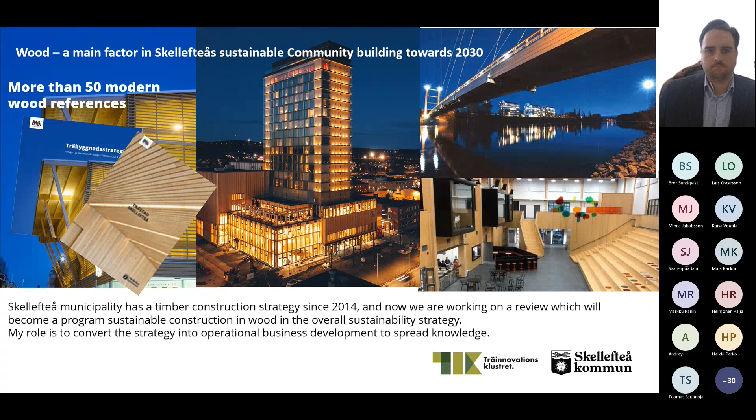I think we will be there quite soon. So, sorry, but I will send you the file afterward. Yes, the materials will be shared afterwards. Please, yeah, then I go to the last slides I have.

Thank you for your attention, and here you have my contact details. If you want to ask any further questions, you can send me an email. In the Wood Innovation Cluster, we value networking and exchanging experience. And then I will leave over to Bror. Thank you.

Hello everybody, thank you for staying in the meeting despite our problems here, but we will try to restart and have a better pace and skip the videos so we don't get into this trouble again. My name is Bror Sundqvist, I work here at Luleå University of Technology, and I will talk a little about the innovation and research we do, basically around processing of timber, promoting new materials and enhancing materials for wood buildings.

To begin with, I would like to orient you to Luleå University of Technology. Some short numbers: it's a little more than 50 years old, a mid-size university in Sweden. The main campus is in Luleå, and there are 4 other campuses. In Skellefteå we have our wood focus, you could say.

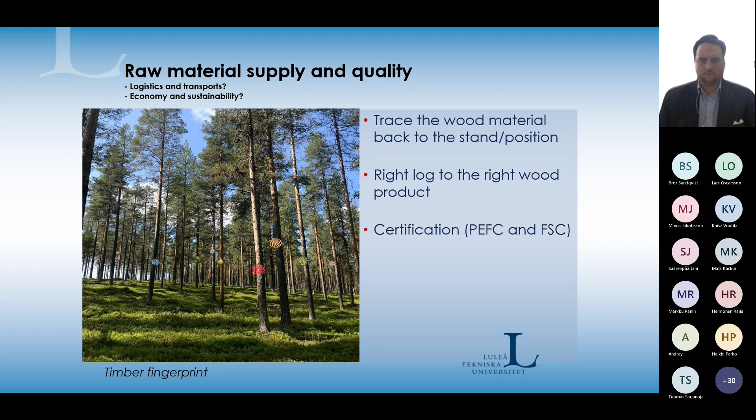This is one of the main core activities we have in Luleå University of Technology here in Skellefteå. Basically since 35 years ago the world leading around X-ray technology for scanning of wood, and it's now introduced since 5 years ago into sawmills all around in Scandinavia to better look inside the logs, to really get the feeling of what type of features do you have inside the log.

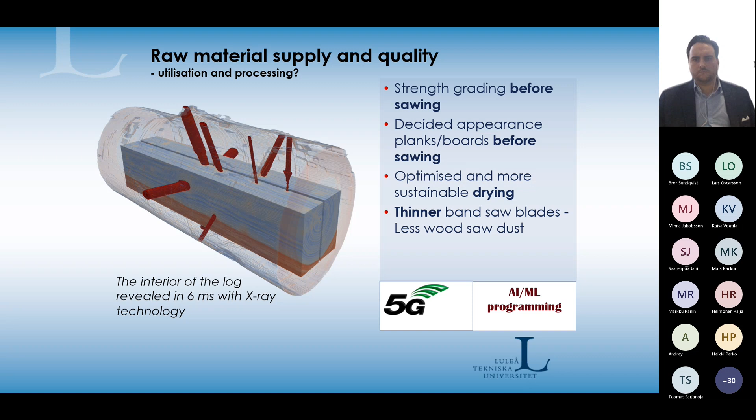And as you see here, this is a simulated picture with a log, and also how you try to, before you saw, decide what type of planks and boards you can get from these logs. And the neat thing about this is that research is trying now to look at doing the strength grading before you saw it - before you have these actual planks, you decide the strength and maybe also the appearance and look of it, if it's supposed to go to fine joinery, or if it's going to construction material, for instance.

So this is a very, very important thing for us. And it's a lot of imaging around machine learning and artificial intelligence. And this is a field that is progressing quite rapidly now.

And of course, also we can combine this with other type of equipment, so we can look at the drying. So we have drying modules linked to this X-ray CT scanning modules. And we can also look at other types of properties while we are scanning this with X-rays, so we can get videos and other types of methods to look at new ways of using wood.

We have also, for instance, a lot of projects around how you can make a more efficient way of sawing. So we have introduced, and it's now in place in a sawmill south of here near Umeå, where they have introduced thinner saw blades. So they are much more efficient in sawing this, and the waste in form of sawdust is minimized.

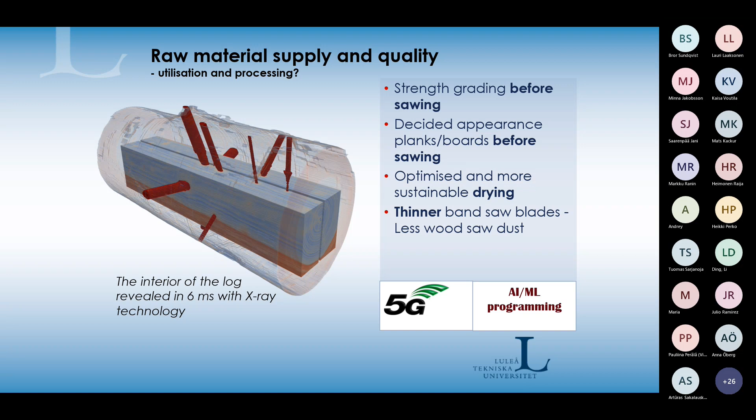So this type of effort we're trying to do - we started this since 2020, the City Wood Research Program, and it's focused very much on research and PhD students to really develop the new tools, the new methods, the new way to process wood in the best way, to address the global challenges, and also to find the next generation raw material supply chain for the industrial wood building. So it's a lot of effort on this, and we think it's very important to be a part of the chain when you use the forest assets in the most optimized and sustainable way.

Of course, education is a key element to take on this new method, this new technology. So we have different types of master programs, and these are top-up programs. Students often come from other programs with a bachelor's degree to begin with, and make their last years here in Skellefteå combined with other courses.

We also have professional education for wood technology, which consists of short courses, mainly digital, adapted mostly for industry to attend. Approximately 80 hours is the time needed to complete these courses. We think this has to run in parallel with all the other development, so there's also the possibility to gain new knowledge and educate yourself.

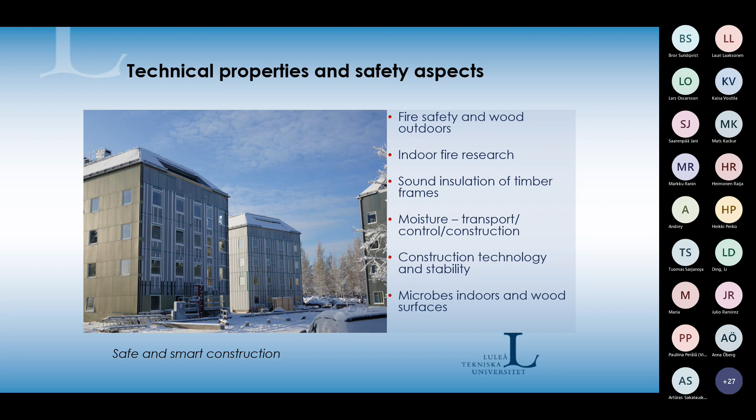This is a project running at Skellefteå Hospital at the orthopedic ward, where we try to look at the health effects of wood. This project has completed some parts of it - the indoor environment has been measured, and the clinical trials will be finished later this year.

So maybe in the future we can hope to build up a competence center around wood and health, and see how this relates and what new methods and new knowledge we need to address this, because it's a very complex situation.

Thank you. That was my speech.

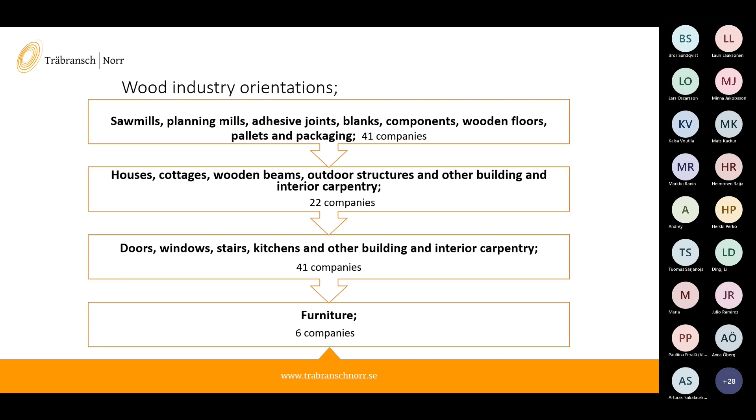Why do I show you this? Because I take my last picture - if you want to have contact with these companies, I'm the business competence, and I can help you further to get in contact with the companies in Västerbotten, because we are this umbrella organization, and I'm the contact to help you solve it. Thank you.

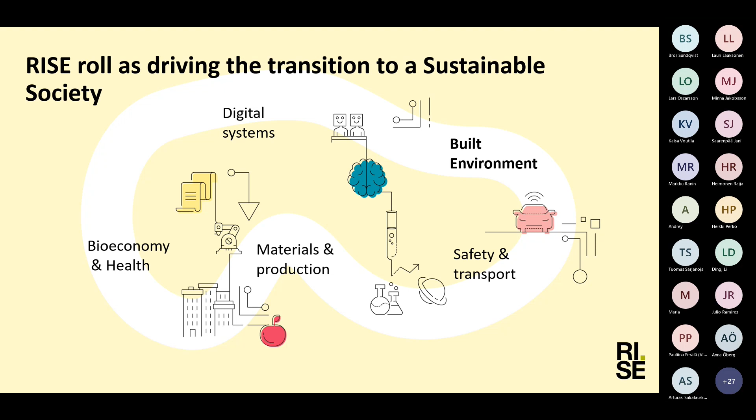The built division is working with society's questions quite a lot, and we work with the municipalities in different kinds of ways. So we are a supporting organization who can contribute with a lot of activities to drive this transition, so Sweden can become the welfare state that is fossil free in 2045, I think it is, if I don't remember wrong.

We are not 100% using bio-based materials yet, but we are aiming for it shortly. So this is a wide example of what RISE is working with, from the north of Sweden to the south of Sweden.

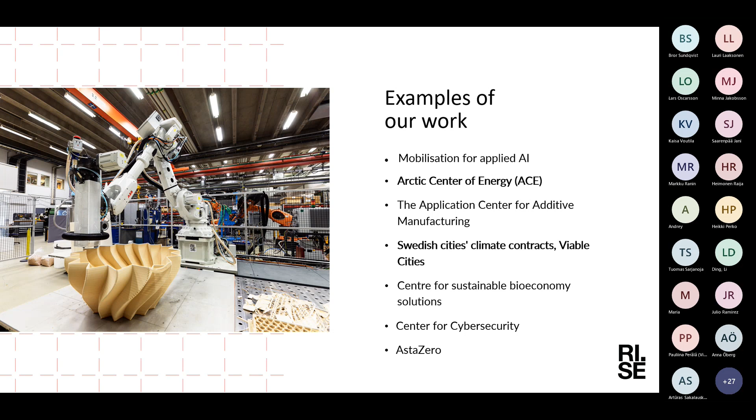If we go down to what we locally are doing—and we are not only working with this locally, we are working with wood questions in the entire Sweden—we also want to support the industry like we do in the cluster. We support the business in a good way, and we do it together, in cooperation, with a lot of activities to support them with technical experts and also the tests they want to do.

If you're looking at the structures, which is quite important when we're talking about building systems—don't know if Lars is going to talk about it, but Lars, you're in the left corner of this with building volumes at Lindbäcks, and you have high productivity—I just wanted to show what kind of building system we have in Sweden when we're talking about wood building with wood framework.

So this is the three system that we're talking about in Sweden. I will not go into detail, but just so you are familiar with it. If you have any questions about it, we can talk about it later, and maybe take it in detail later on also.

If you're looking at the culture house in Skellefteå, it's a combination of all structures, so to say. The hotel is volume based, and the framework is pillars and posts and beams and all that stuff.

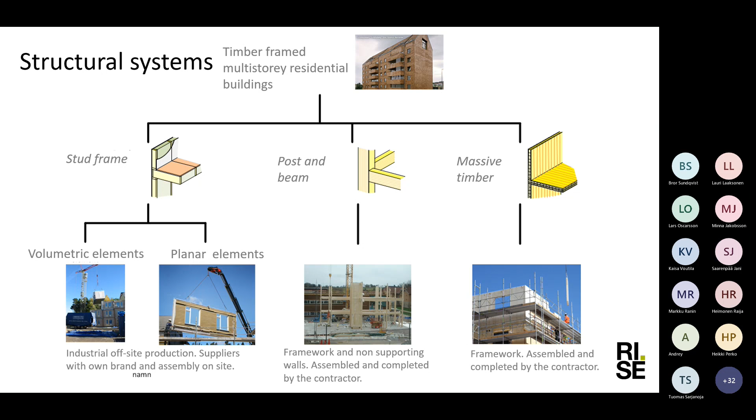The business of multi-storey houses has increased quite a lot the latest years. When Sweden joined the European Union in 1995, we were allowed to build higher than 2.5 floors, and now, as you know, in Skellefteå, we have a hotel that is 20 stories high.

So the business is increasing quite a lot, and a lot of this we can thank the research, the technical aspects. We have solved a lot of issues, but we need to continue doing it with the fire, acoustics, and moisture. And also we can thank Lindbäcks Bygg for their prefabricating volumes, which has reduced the production time.

But what we also see is that the building sector today, the total building sector, is quite a big contributor to CO2 emissions. By using wood, as Bror said, we store CO2 during the lifetime of the building, which is quite good also.

So the climate declaration that arrived in Sweden in 2022 will hopefully also increase this expansion of wooden buildings. But we still need to do a lot of research, and that's why we need Luleå University of Technology and RISE, and we also need the local partners to develop this.

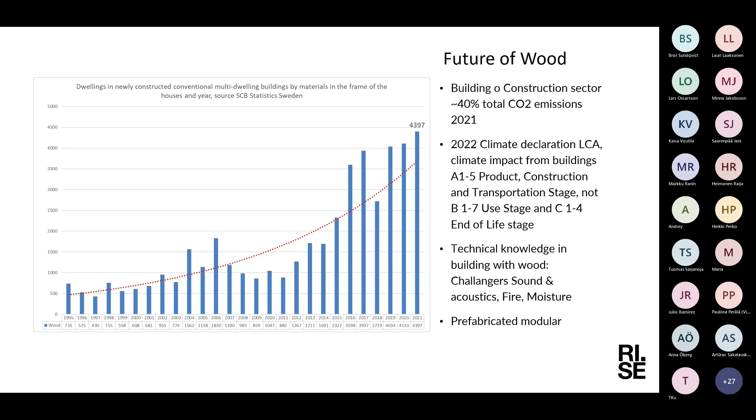We also need to think about using wood in a better way, and not only like we have in Sweden, where we have a linear flow. We need to make it more circular and think about it in the early stages.

I will show you some of the examples that we are working with, but we are quite focused on this. To do that, we need to be working together in cooperation with the business, and Sweden is also an important communicator to work with this, to explore this further. We need to test and verify if we can circulate the building that we are building today, so we can circulate it tomorrow. This is some of the activities we are working quite heavily with.

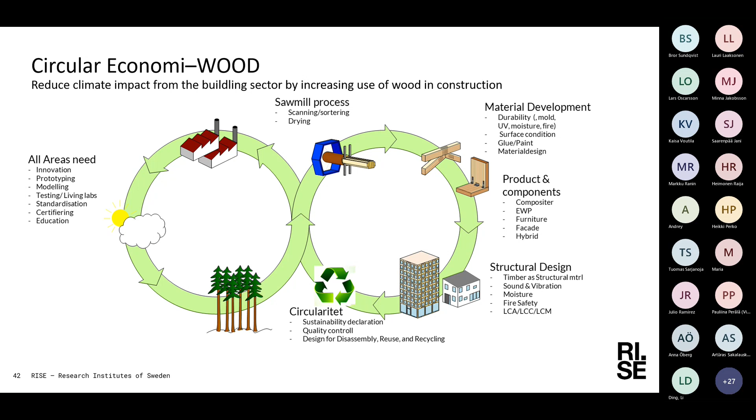So we're working with deep learning and using modern techniques to optimize the process in the sawmills. This is a project that Jessica Becker has also participated in, and RISE has been a part of that, along with Arbio and Swedish Wood. It's quite a nice product to show.

The project has ended, and I wanted to show you that you don't have to tear down all the buildings that are built in concrete and replace them with wood. You can build timber light construction on top of a building. In Umeå, for instance, on top of a marketplace in the center of town, they've built nice apartments. Umeå is quite a nice town with a lot of these on-top buildings, so this is something you can use.

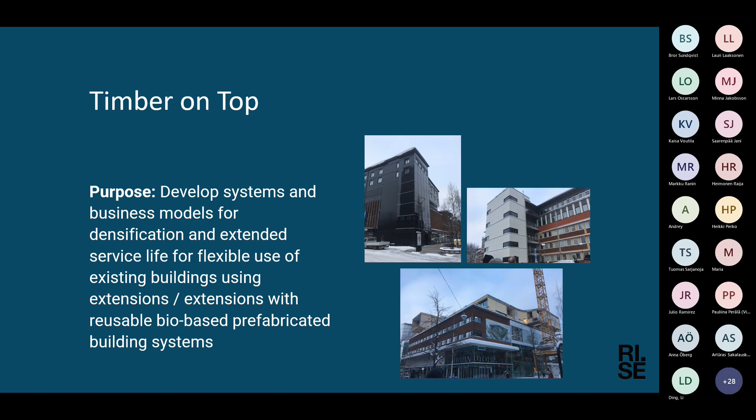This is also something we're working on. We don't want to focus only on wood in wood buildings - we can also use it in wind turbine towers. This is a project we are running together with a company called Modvion that started this journey in 2015, and now we are doing some trials. Hopefully by Q3 we will have the first 100-meter wind tower placed in Varberg in southwest Sweden. That's 100 meters high, so we are aiming for this, and it's really nice to do. We're hoping this can be a good business opportunity to use wood in other applications, and as you can see, this stores quite a lot of carbon CO2 if we manage to do it. So far, everything looks really, really good.

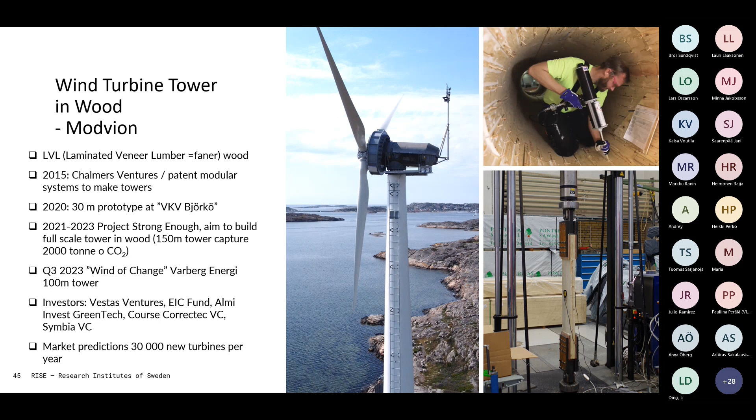To end my presentation, we have also worked to make the wood value chain a little bit closer, together with Lindbäcks Bygg, to design for the future. The municipality of Skellefteå is also part of this work, and here we want to find a good way so we can replace or move a building if needed in the future. So if it's a kindergarten, preschool, or something, instead of wanting to move it elsewhere, you should design and build the house so you can easily reuse it somewhere else, instead of it ending up like chips in a power plant. This is something we're working on. We think it can be a really good case for working with building volumes, because then we have high value instead of using planks that end up in the municipality's junkyard.

That can be a little bit hard, so to say, but I think this is something quite nice to know about. The project will end this year, so hopefully a presentation will be available next time so we can talk more about it - what the obstacles are, and also find other possibilities to start reusing timber buildings in a circular way. So these are some activities that RISE is doing in Skellefteå.

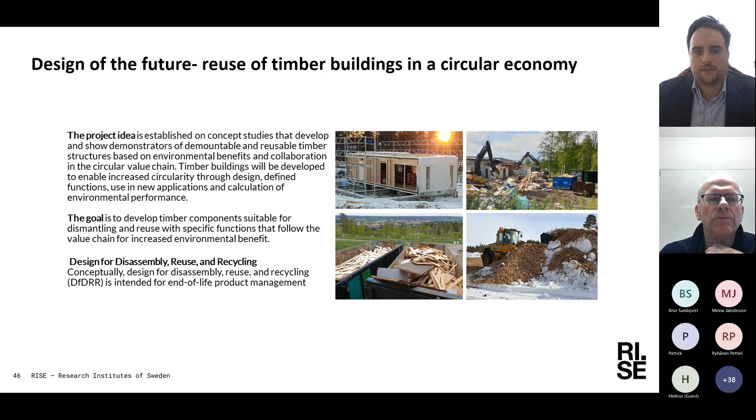I see, thank you all for your presentations. I think we get a nice view of different types of actors in the cluster and what you contribute, and how the collaboration actually happens. I think we will take the questions at the end, so that we get the presentations through, and then we have reserved time at the end for questions.

Hi, I'm Henrik, and this is our factory. We are an industrial building company using wood from the northern forest, creating apartment buildings in Europe's most modern production facility. In a weather-protected environment, the volumes are built step by step along our preparation station and our main production line.

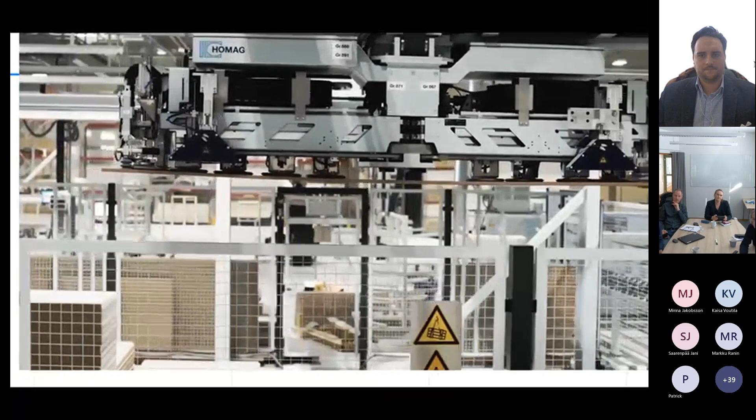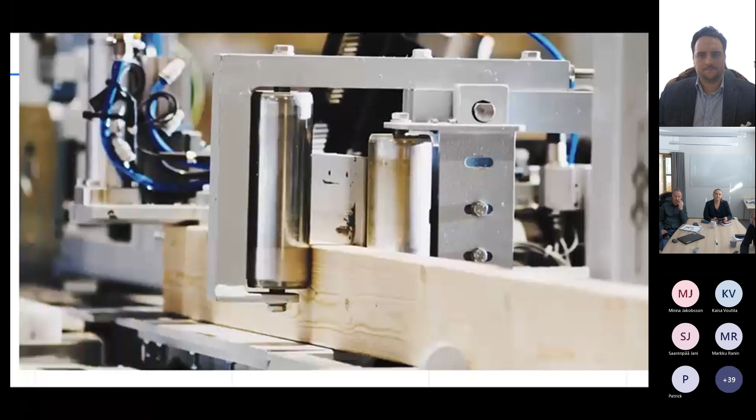Our building system can fill many different needs. We build everything from student housing, rent-controlled apartments, to condominiums and retirement homes. We offer a full service solution where we take responsibility for the entire process, meaning security in terms of price, product and delivery times.

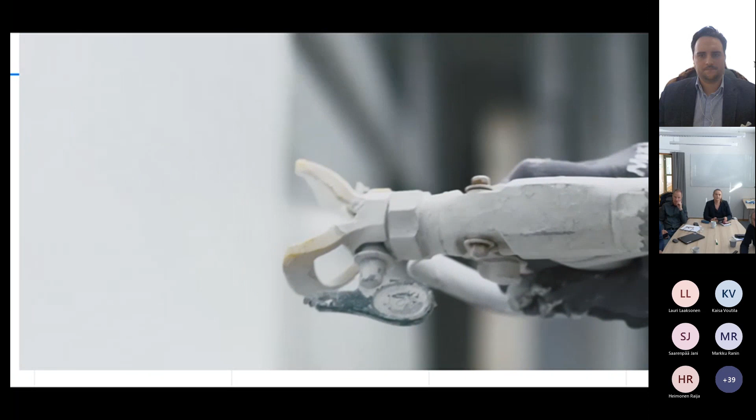Along the wall line, the exterior walls are put together. Here, we assemble windows, bolt, insulate and paint. When the wall is ready, it proceeds to the main production line for assembling. In parallel, the partitions are built and painted. Just as the exterior walls, they are fully finished when they are assembled.

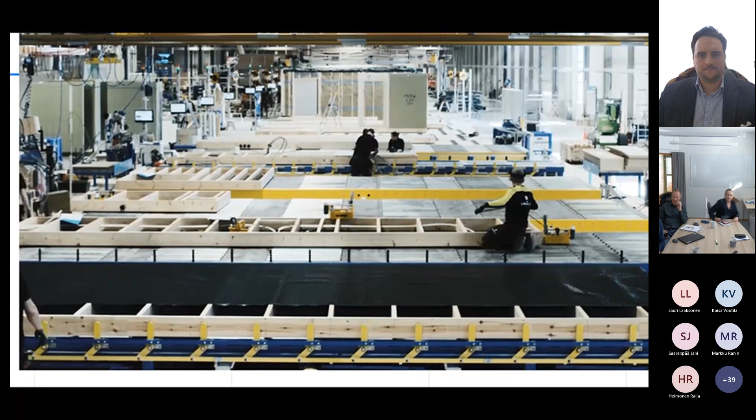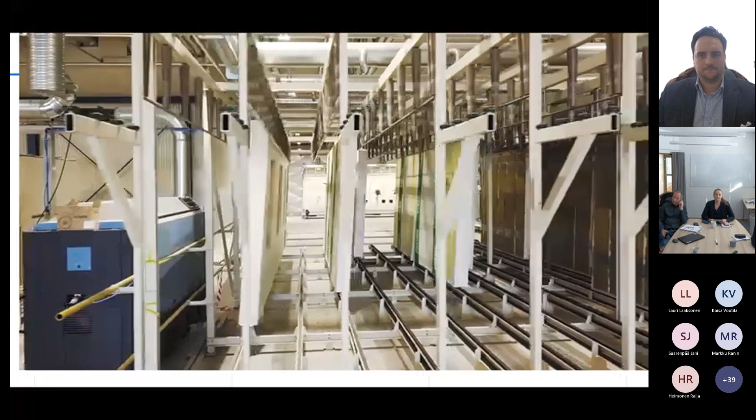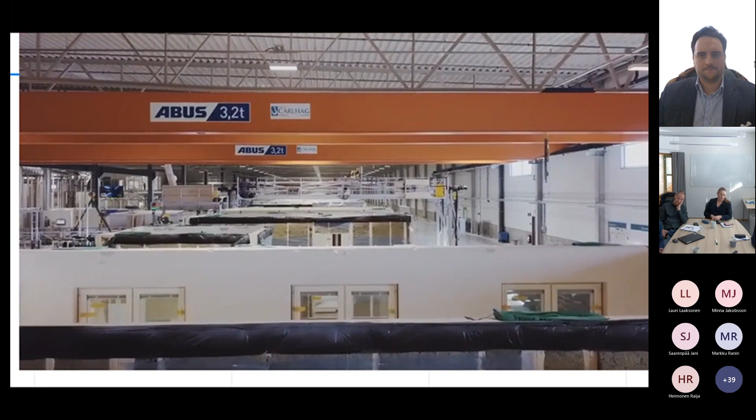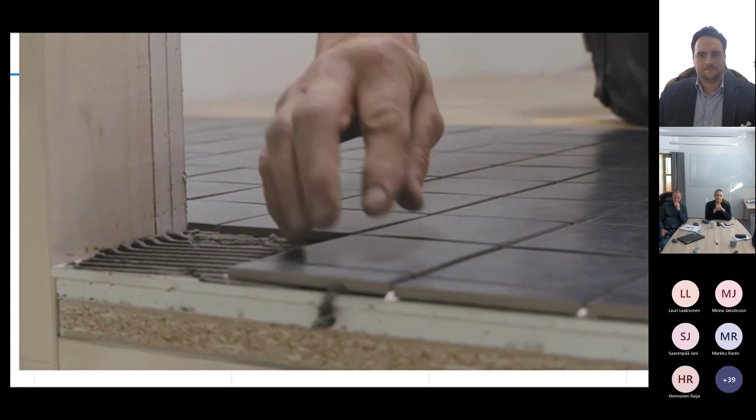The main production flow begins with the construction of our floor structure. Then our composite bathroom is put in place and partitions are applied, as well as exterior walls and ceilings. When all elements are put together, we install the kitchen and apply the floor surface layers and complete with plumbing. After that, we review the volume to ensure quality.

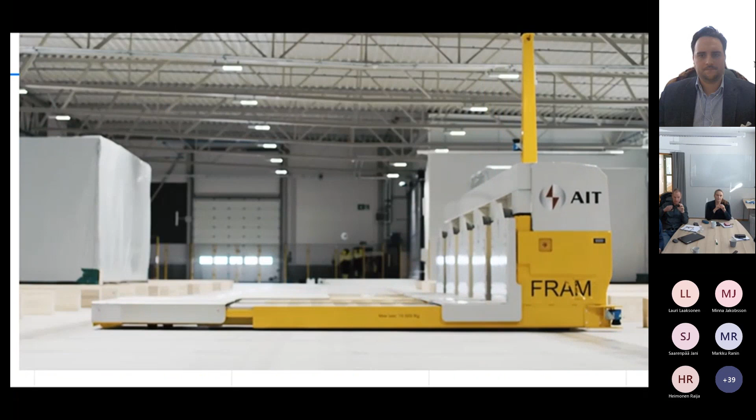In the last step, the module is sent to the automated warehouse, where it's collected by an autonomous robot loaded on the trucks. All that's left is delivering to the construction sites. Thanks to our industrial construction, we manage resources efficiently and build climate and cost efficient with high security.

We build industrial because we believe in creating homes for more people. We build industrial because we believe in living for more. We build industrial because we believe in living for the many.

The company was started in 1924, and next year we're going to be 100 years old. Today, at the management level, we are in the fourth generation, but the fifth generation has started to work in the company. In the start, it was a sawmill that did sawing of the lumber in the wintertime and building a house in the summertime.

We continued with that for a while. In 1994, as Rickard mentioned earlier, when we joined the EU, it became possible to build more than 2.5 storeys. So now it's possible for us to build up to 8 storeys high in volume modules.

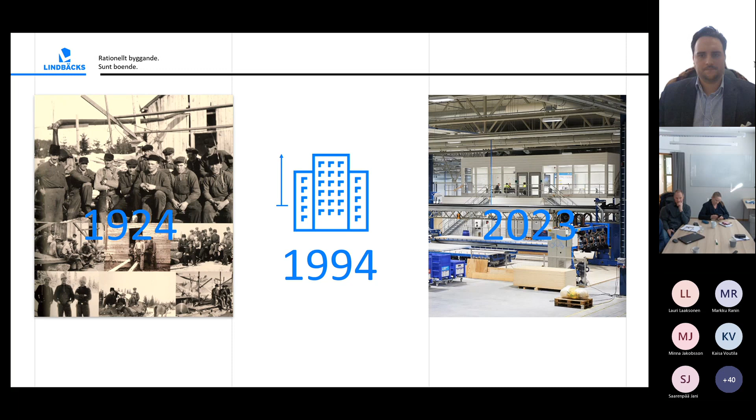Our capacity in 2 factories is about 22 volumes per day, and we can do up to 2,500 volumes a year. From 2017 to 2023, we have threefolded our capacity, and our turnover this year will be 1.4 billion Swedish crowns.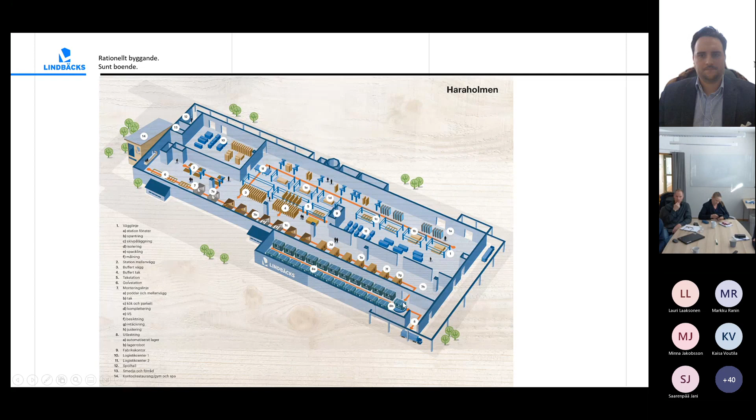Here is a layout for the Haraholmen factory. We build the walls here, and here we put the volumes together that you saw in the movie. Here is the ready stock, and here is the loading onto the trucks. Very important parameters here in the factory are the man, the machine, the method and the material, and it's a collaboration of these things. It's very important, when you do development, to take care of everything.

We do this with ecological, economic, and social sustainability in mind. To do this in a very good way, we use lean production, and we have adapted our tradition of building wooden houses, so we call it industrial production according to Lindbäcks.

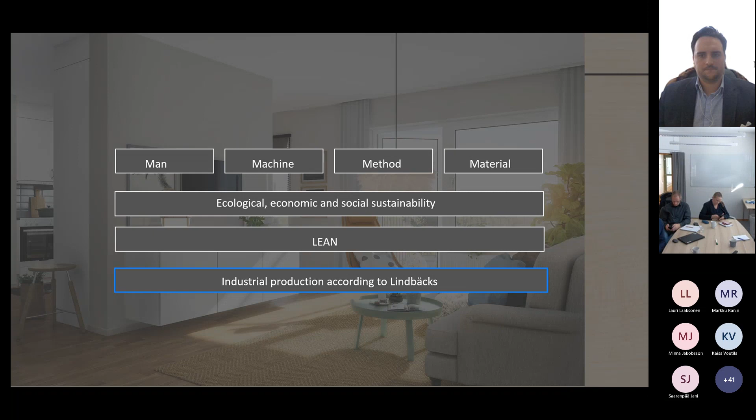To build a house, you need to have an idea. Then to design the house takes about 30 weeks. The next step is production, which takes about 4 weeks, also inside the factory.

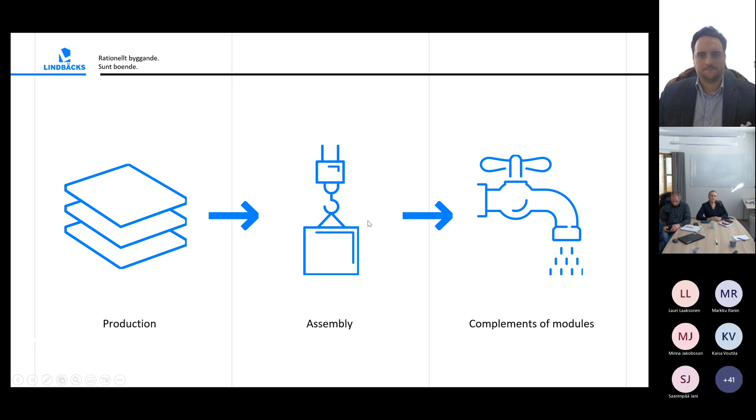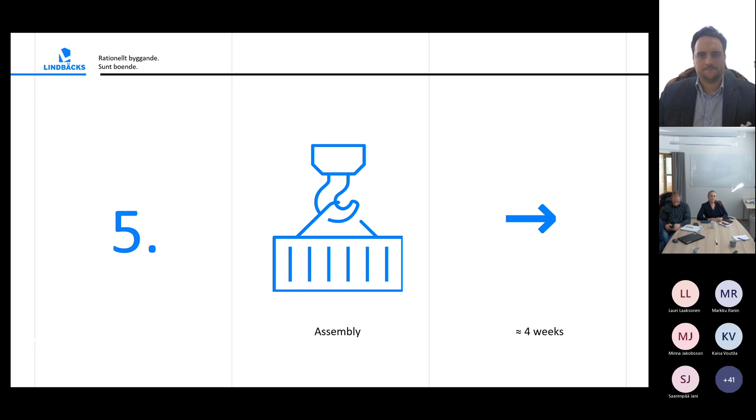And it's production, assembly, and then we do the interior in the volume. Then we transport to the construction site and assemble the house. It takes about 4 weeks. Then we do the completion of the house, fit every volume together, do the rest of the painting, ventilation, and electrical connections that weren't made in the factory. You need to do a completion on the construction site, and do the facade, to make it work in a proper way.

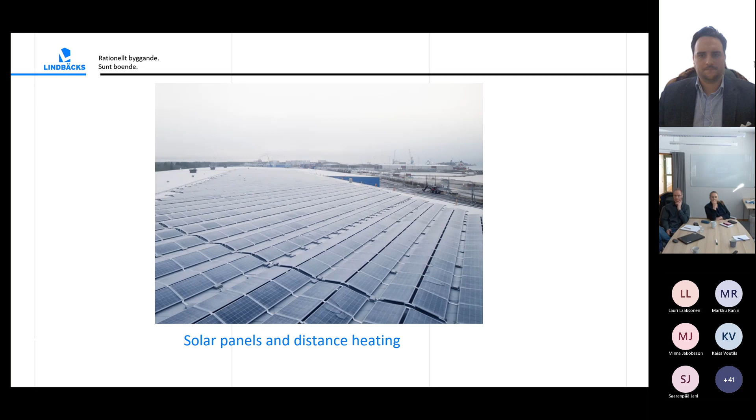We build ideas because we want to make a difference. We aim for 50-50 between women and men, but it's a challenge to make it work. We put about 3% of our turnover into research and development, and we have a big collaboration with Luleå Tekniska University in Luleå and Skellefteå, and a big collaboration with RISE in Skellefteå, and a lot of work with RISE in Borås too.

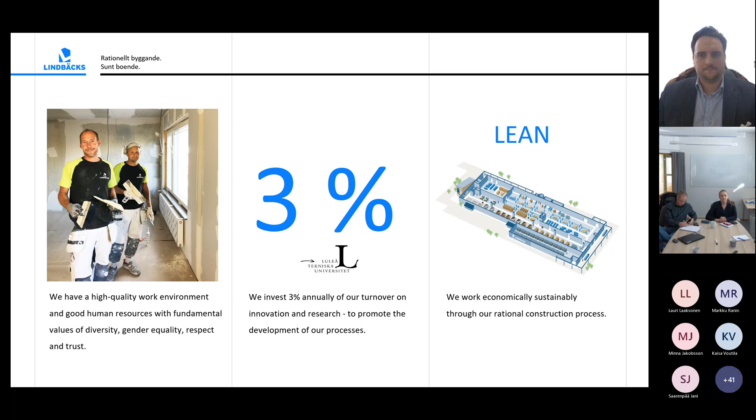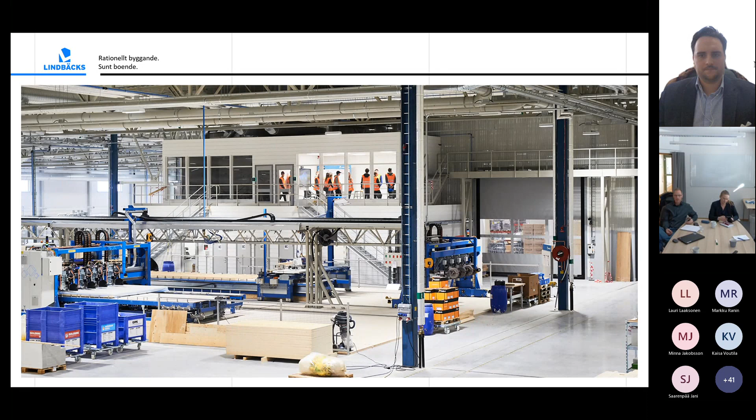Here we have some pictures from our factory at Haraholmen. Here we have integrated the managers' offices in the factory, and here is a logistics part where we pre-pack everything and then send it out into the factory.

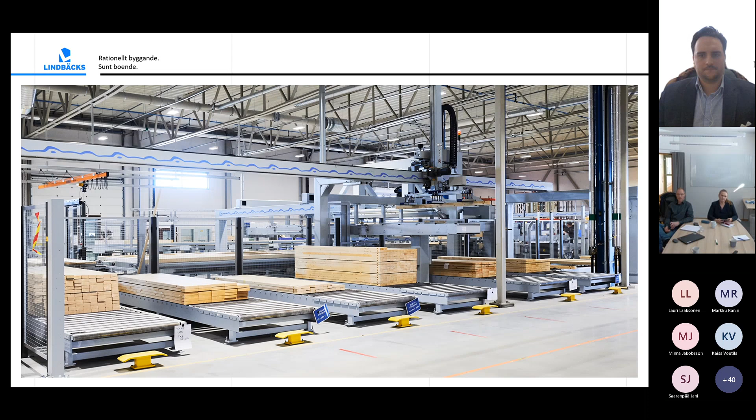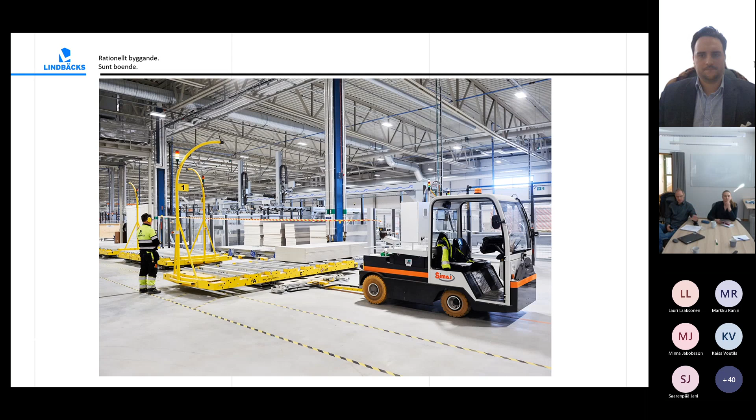Here we have studs for building the house, and here we have the train with gypsum. The gypsum has the possibility to protect the wooden studs from fire and create stability in the house. It's very important to have a mixture of materials to optimize it.

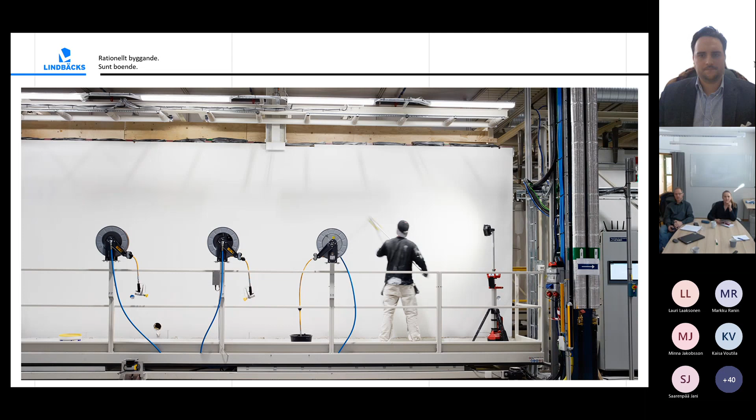And here we do the grinding, sanding, and painting. Here are walls in our system. And here you see the floor, and on the floor we have a pod—it's our bathroom unit, a daughter company of ours.

A challenge when building this factory—the factory is actually 400 meters long. If we hadn't produced this kind of bathroom pod ourselves, the factory would need to be about 600-700 meters long, because of the challenge of drying the tiles for the fixtures behind them. That was the reason we started that company.

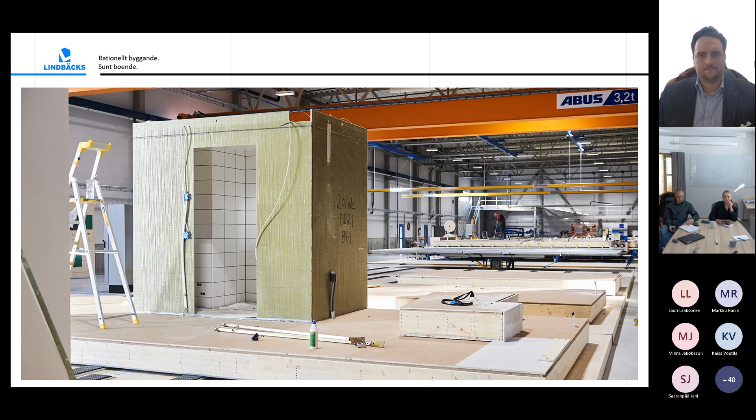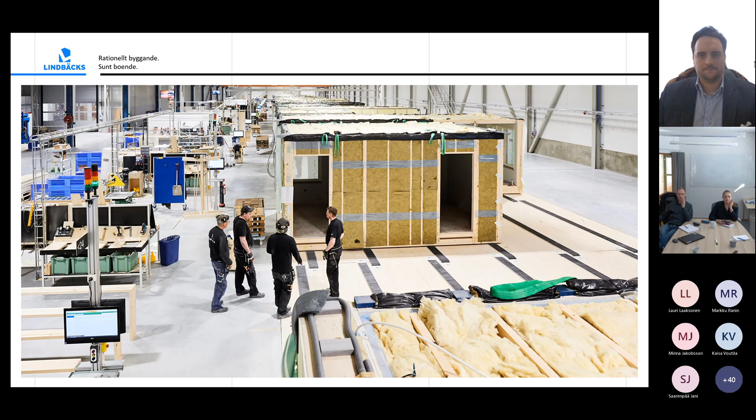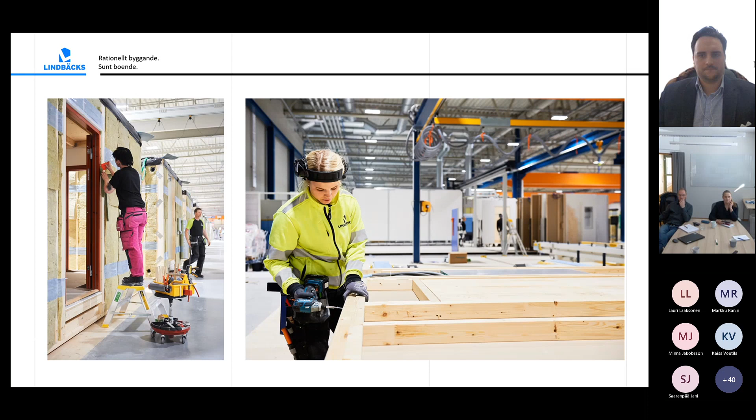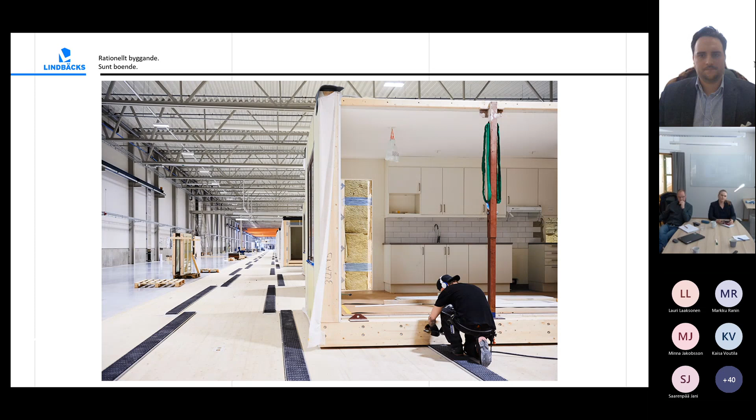Here is a wall that we put around the floor. Here you see we have the insulation between the studs. And here you see a kitchen ready in the house, and parquet—the floor is ready.

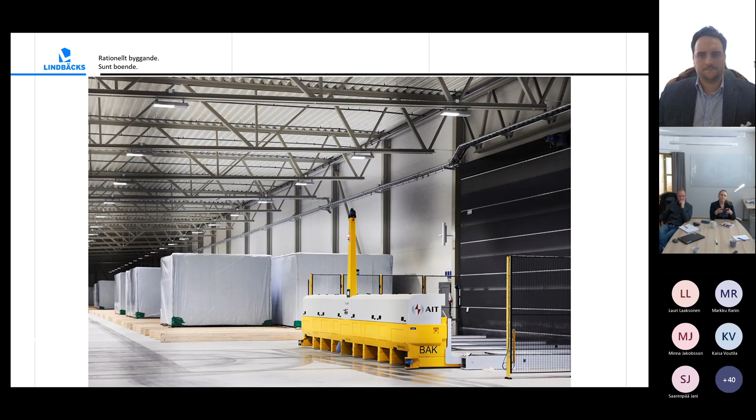There are more volumes coming. Here is the ready stock of volumes that we handle with an automatic truck. And here we lift the volumes onto a ship.

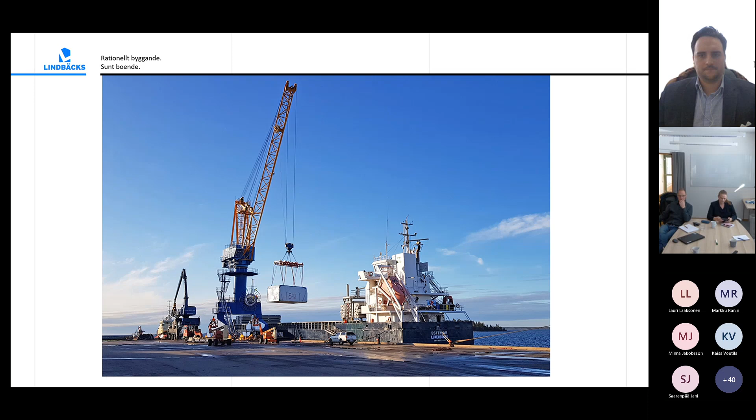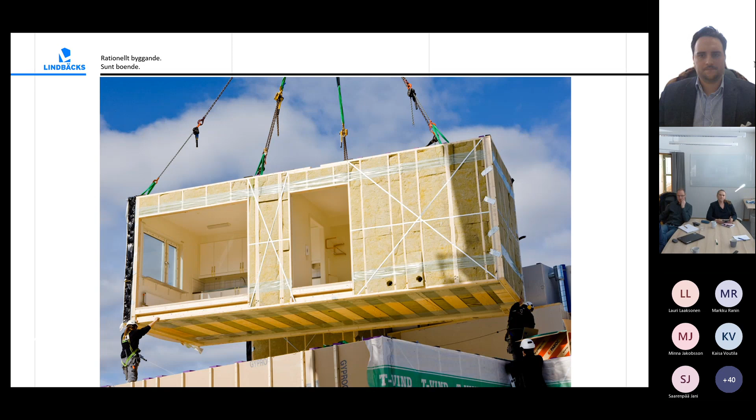And here's from the construction site, where we have a crane that lifts the volume from the truck up onto the house. Here you see we put up the roof on top. So this kind of house can be built up in about a week.

We build history because we believe in the future. So thanks a lot for listening to me.

Okay, thank you. I'm just going to share my screen here with my presentation. Just a minute—do you see my full screen? Yes.

Okay, thank you everybody who came before me, and thank you for letting me present Wood City Sweden's work in Sweden. My name is Jessica Becker, and I'm the operating director of Wood City Sweden, and also an architect. I've worked for the past almost 15 years with industrial built wood solutions, building solutions.

Just a little bit about Wood City's purpose. Our purpose is to spread knowledge about wood building in general, but also very specifically focusing on public procurement and urban planning. And what we do is create seminars and conferences, also in collaboration with others, and also participate in collaborative projects, which I'm going to tell you more about later. We also offer support for municipalities and regions when establishing strategies for sustainable building and wood building, which is an important part of it.

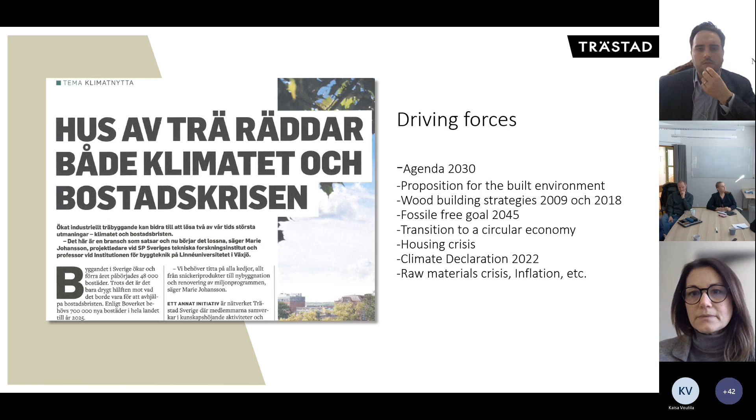So Wood City's background is we're celebrating 10 years this year. It was actually started even earlier, but with the participation of, among others, Skellefteå and the region of Västerbotten and also Småland, which are very strong forest regions. Then it was founded as a non-profit organization in 2016 with the support of the Swedish government. We also have about 60 members, ranging from municipalities, but really the whole supply chain with architects and engineers and so on.

Very specific projects that we are involved in: the first is called Wood First, which I'll tell you more about later, but it's a digital platform to help support specifically municipalities and regions to implement strategies for sustainable building, where wood and timber structures are an important part of that. We also have another project that Rickard from RISE mentioned, called Timber on Top. As he also mentioned, the actual Vinnova project is completed, but this is such an important topic that Wood City Sweden is going to continue efforts on working with Timber on Top as a topic, to disseminate information about it, and also to create a network for exchanging knowledge and experiences in building, which is highly needed to increase the building of additions on top with industrialized timber solutions, prefab solutions.

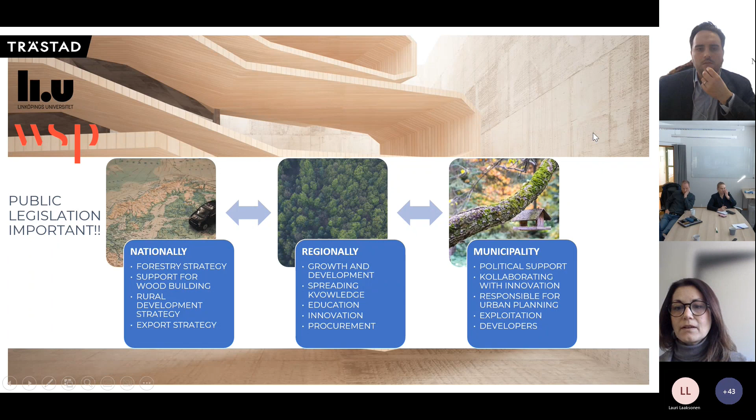So what Wood First offers is a hands-on support tool online, and it dives into different areas, starting with general knowledge on wood building, industrially built solutions and prefab wood building. It also goes through strategies and regulations, the urban planning process, and public procurement, where we see that a lot of municipalities need support.

The purpose is also to identify where the opportunities are for that specific municipality, since municipalities are very different in size and structure. You have to be specific about where the largest opportunity for change is, and this includes identifying key roles, making sure both politicians and public officials are on board to get the best effect.

The goal after these digital workshops is to design a successful strategy for sustainable building, where timber is a very important part. Procurement is a means to achieve this goal, key players have to be part of it, and you have to be very concise in setting measurable requirements and goals.

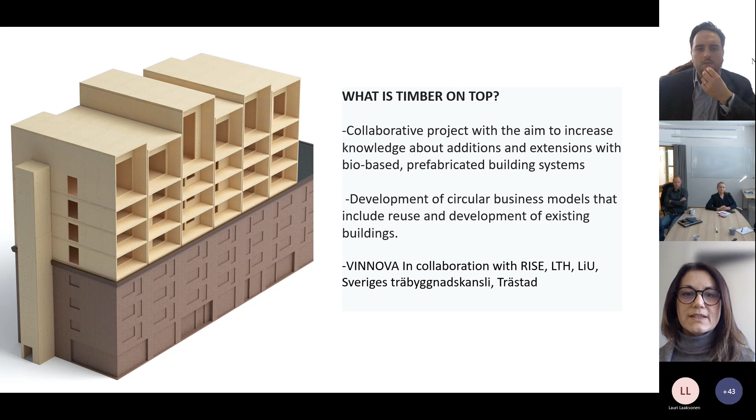The development of circular business models includes reuse and the development of existing buildings, which is a very important part of this. We want to continue this collaborative effort to get the exchange of knowledge, which we see as very important to keep moving forward with add-ons on top.

So the conclusions we can get from this: the positive aspects are minimizing the building sector's carbon footprint by using what already has been built. We can draw a parallel to the circular economy here, this is an important part of it, also minimizing the use of virgin land, and it's a way to minimize demolition of already existing buildings, which is a problem.

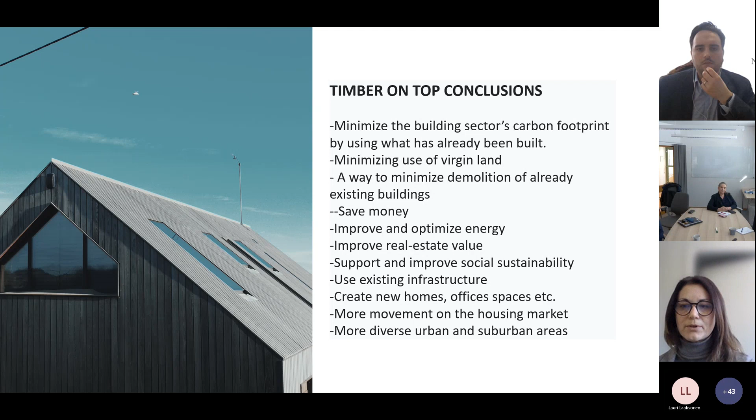It's a way to save money, to improve and optimize energy values of property, improving real estate value, supporting and improving social sustainability, using existing infrastructure, creating new spaces like office spaces and homes, getting more movement in the housing market, and a more diverse urban and suburban structure.

We also have a digital platform for Timber on Top, which is a quick online course to increase knowledge on extensions and additions in prefab wood solutions. So this is also offered online.

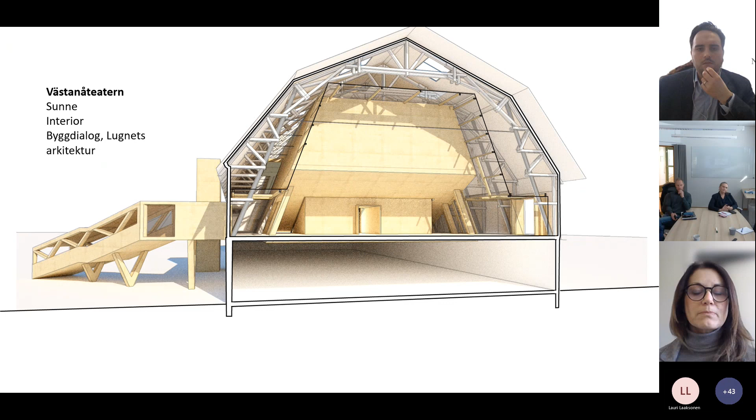So it's very flexible to use wood and prefab solutions for this type of additions and extensions. This is also from Stockholm, a more urban environment, and from Umeå, where they did an addition on top in the city center.

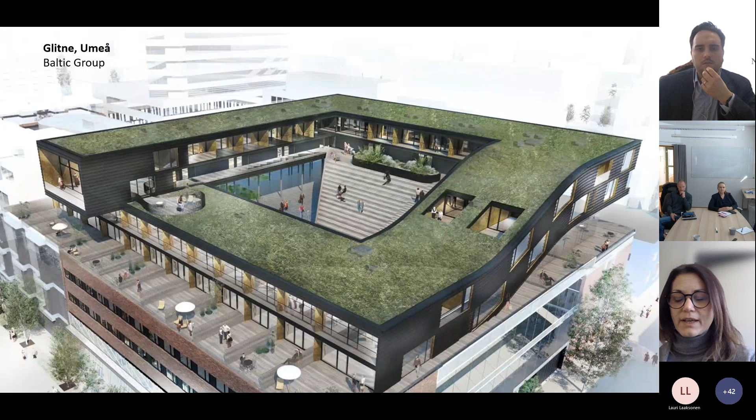So as we're seeing, the whole industry is changing here, and we're actually seeing the upside of the business side of timber structures as well. Thank you very much.